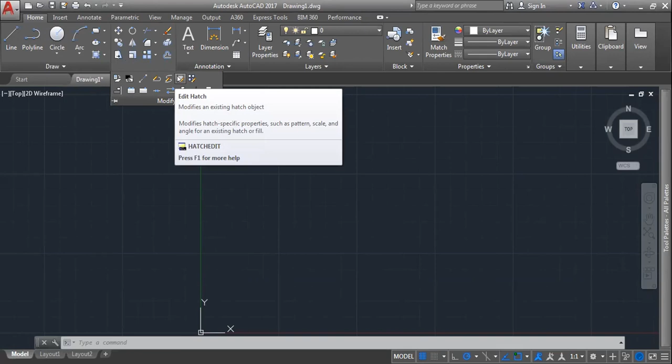Yes, see, below there are many tools. Many of these are not required. Only a few are most important for us, because in this, edit polyline and edit spline, by directly double clicking you can edit it there itself. Edit hatch, as I showed you, by double clicking on the previous hatching we made, we can edit the hatch directly. We don't require this tool. Edit array, polar array, also the same way. And coming to set by layer, before this we need to make layers.

Lengthen, this one I will tell you. Lengthen means it will decrease the length ratio-wise. Let us make a triangle, or let it be a line like this one. Enter. Now select lengthen, LEN is the shortcut. Select the lengthen object, provide the references, and now provide the percentage; especially we use percentage. Select the percentage you want to decrease. Previously it was 25. It will calculate from here to here as 100, and out of 100 it will decrease percentage-wise.

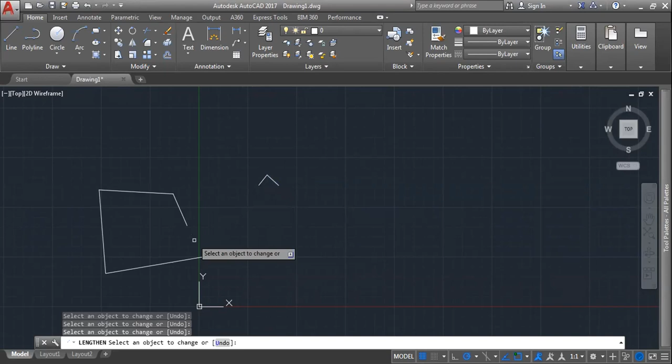I am mentioning 50. See, from 25 converted to 50. Out of this overall length, it will convert that 100% length to 50. In the same way, upward, top, bottom. Actually we will not use this tool much, even though I am explaining it. Overall this tool will cut to the exact midpoint. If I mention 75%, it will cut to 75. 90 means 90%. And after finishing, press enter. That's it. Should I repeat once more? Repeat, sir.

L enter, line. Make a triangle or rectangle, whatever you like, specially using line. Now, lengthen's working principle: LEN is the shortcut. It will cut the parts by percentage or delta or dynamic; percentage will be better for you, to calculate easily. Previously I placed 50%. If I want out of this only 10%, selecting the object, it will cut overall 90% and keep 10%. See, out of this 100% length, it will keep only 10%.

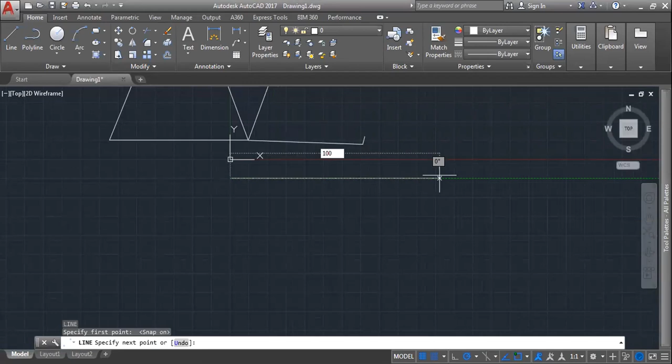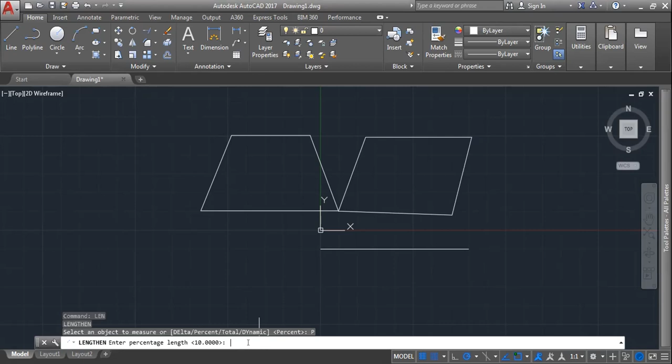For example, I'll enter, let it be 100. Enter. Now extend, like this one. Enter. Fine. Now LEN, enter. Now select how you want to reduce this object. I am selecting percentage. It will measure from here to here as 100%. Out of this, how much you want to cut, you need to mention. Let us mention 50%.

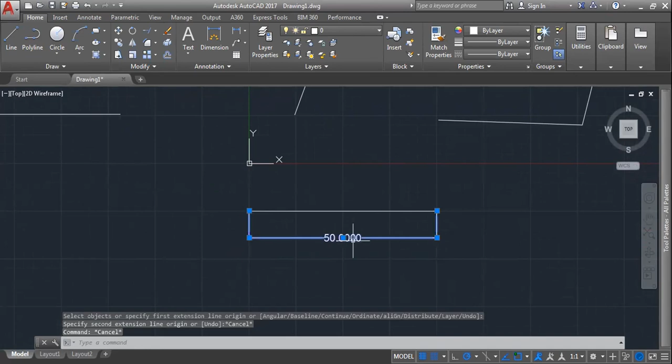See, I am selecting the line. Here we provided 100. Here we didn't provide the dimension, directly we are cutting. Wherever you select, upper side or bottom side, it will calculate on its own and provide the output. Finally enter. Now DIM, enter, we check the dimension. We made a 100 length, and now we got 50 after cutting. Did you understand this? And it will cut from 50 also, 50% at a time.

LEN, enter. Select percent, 50. Enter. Now out of this 50, it will make it 25. Out of this 25, it will cut it to 12.5. Out of 12.5, it will cut to 12.5 by 2, that is 6.25. DIM, enter. From this to here, see, as I said, 6.25. Got this?

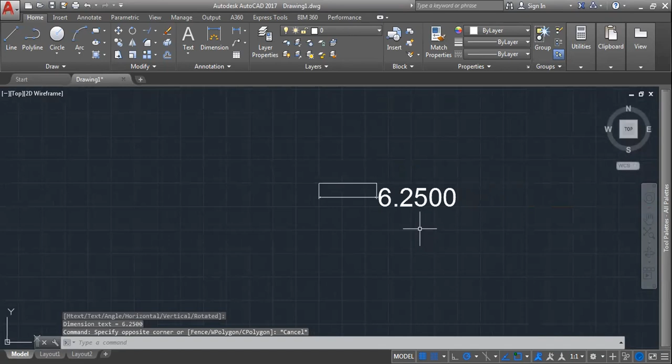Have you understood this tool? Yes, sir. Fine. Yes, sir. It is nothing. Actually, we won't use it, even though, chalo, let us try a few more tools which are used. Okay, I'm coming to the next tool.

Break. Okay, break and break at point, these two. Let us make a circle of 100 diameter, 100 radius. For break, if we have a reference, that will be an advantage. Okay. But rather than using the break tool, trimming will be better. But let it be, no issue.

Select the break tool, BR, enter. Select the object which you want to break. A reference is mandatory, as I said, how much you want. Before breaking, we need to provide a proper reference. If you are using a line as reference, from this line to this line, we can break it directly.

And coming to next, break at point. If I am selecting an entire single circle, it will divide it into two pieces. Select break at point. Now select the object. Now specify the point which you want to separate. I want to select the midpoint. Finish. Now see, first arc, second arc. It divided into two parts. Should I explain this once more? Break at point.

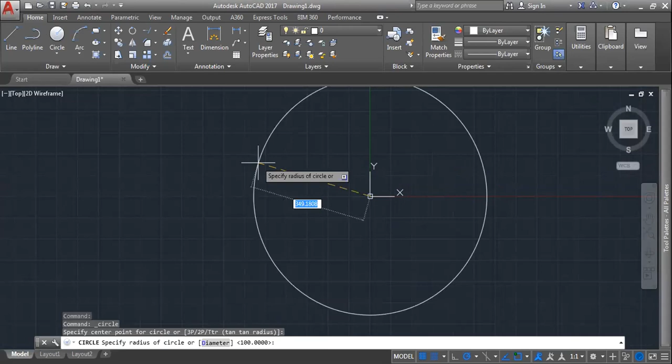C enter. Let us use a circle for this, 100 radius. Now BR is the shortcut, and here it will break. It will cut it out directly. How much do you want to cut out? Better provide a reference before starting. And select here. Got it? Breaking tool: it will cut the object from one point to another point. And coming to next, break at point.

Break at point means, see, this is an entire single circle. If you are making an individual arc or circle, see how it comes. If I am making an arc, first arc, and again, it looks like a circle. Okay, see, it has broken into two pieces. Got it? Like this. This is a single piece.

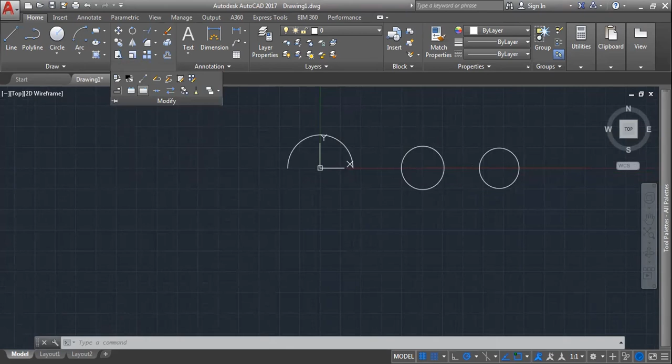And see how a single circle looks without breaking. If you select it directly, it will choose the entire circle. Here only the arc is chosen, separately: top as one, bottom as the other. And this is a single piece. Now I am going to break it. Select break at point. Select the object and provide where you want to break. Midpoint. Now see, first, second arc. Got it?

Individually. Now for this, again select, enter. Select the object. It chooses only the top one. Where do we want to break? It has chosen the other. Select this one, select the object, now provide the point. I've selected the midpoint. Now see, first, second arc and third arc. It will just break, nothing else. It will separate the object into two pieces. Have you understood break at point? Yes, sir. Fine.

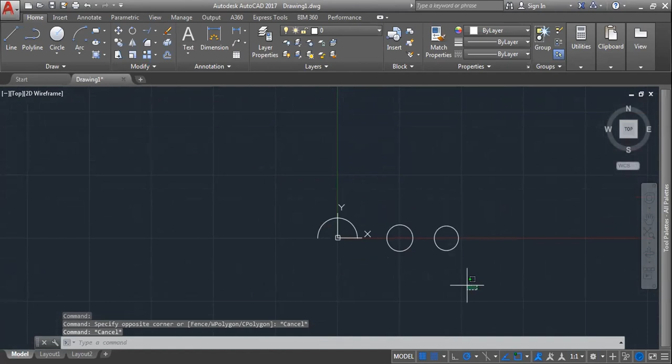And coming to next, let us start the annotation part. First the main dimensions; I will clear all these once more, and also tell you the difference between this and this. And this one, how to make a table. Text, let us see all these. For dimensions, we need a reference first.

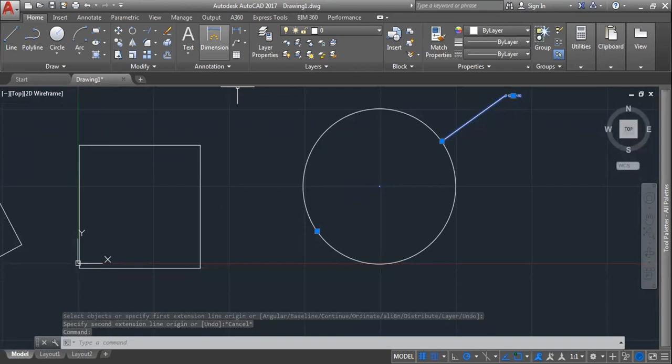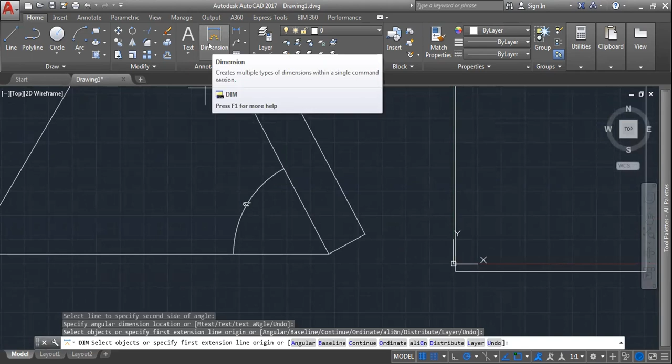By using this single tool, we can choose dimensions individually, whether linear, horizontal, vertical, or anything else: linear, angular or circular. It will even provide angular from one to the other. This works as an all-rounder. Any queries? DIM enter. That works as an all-rounder.

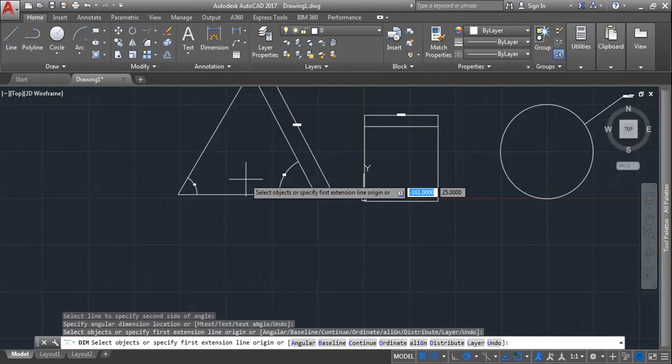See, first it provides linear. Again, if I select this reference, it will provide angular. So automatically it regenerates itself. Any queries in DIM? Have you understood this dimension tool? Yes, sir. Fine. And coming to next, this is linear.

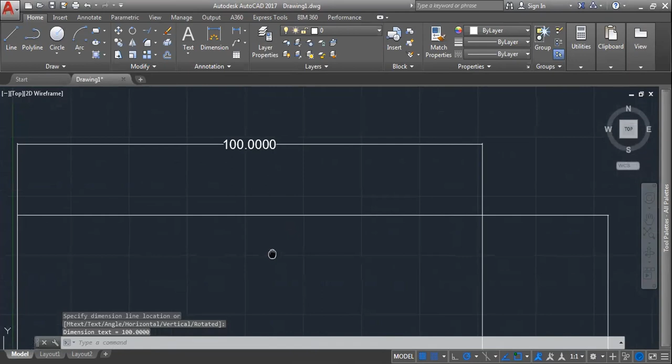What is the main difference? Here it analyses by itself. In many cases, if you want to provide radius, it has provided diameter directly. See the symbol. In that case, you need the manual process. Linear means either vertical or horizontal. The output you get will be perfect. 100 plus 100 we got. For both, output will be perfect. See here also 100. But the selection needs to be perfect for that.

Aligned means angular dimension. For angular you need to use aligned. If I am using linear and selecting this end to end, see how it came. As I said, it will come either vertical or horizontal. See again, linear.

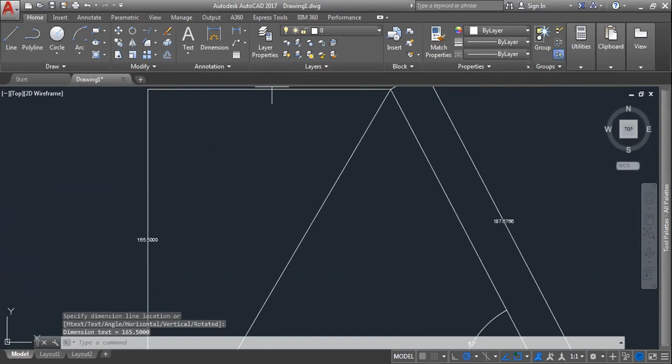Got it? It looks angular, but with this you will get only linear. And if I'm choosing align now, select this one and this end to end, it will choose specially angular length. Okay, align length, angular.

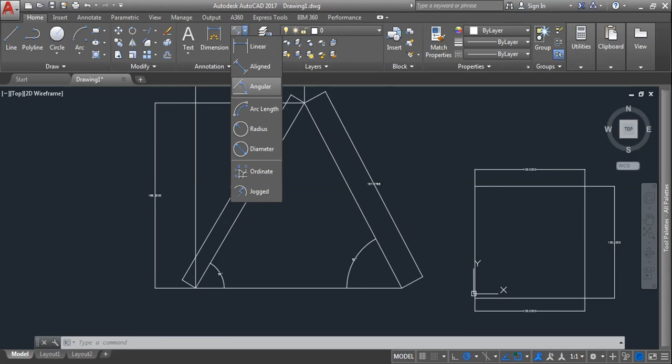That means if you want to provide any angle, select these two and provide the dimension. This angular will provide only angle. For that, two lines are mandatory. With a single line you won't get angle.

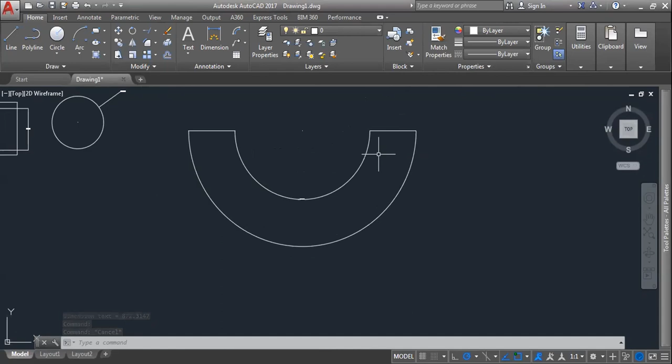Okay, next arc length. Let us make an arc. For arc length directly, it will provide the arc length. 872.3147 - this is the arc length, just as chord length. Okay, and anyway, we won't use this arc length.

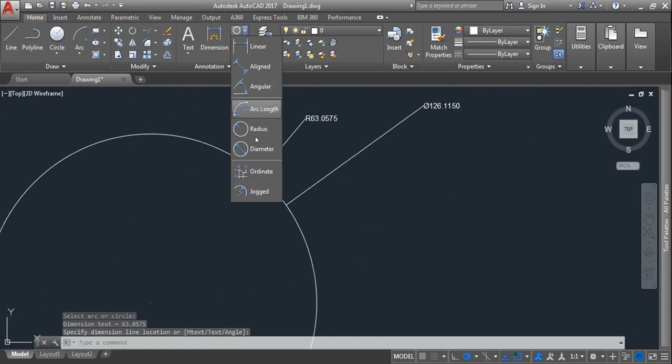No one uses it, especially radius and diameter we depend only on. Radius - here see, manual process we have. If you want radius, you will get radius. If you want diameter, you will get diameter manually here itself, in this only. The output for both will be same, no worries. Okay, radius. Got these all? Yes sir. Okay, fine then.

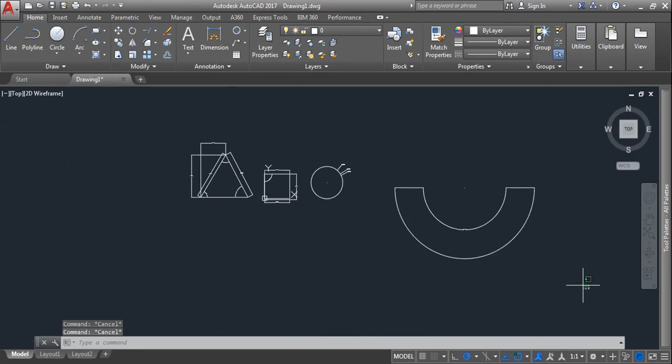And leader - these all specially for welding, as welding symbols for mechanical we use. If there is any mechanical tool which we need to weld, part and anything else, for those portions we use this one. To provide proper welding symbols, there is a certain welding and specially mentioning the ratio, 5 like that. Mostly mechanicals will use this. For civil and electrical, not required. This one, see here you can.

And table - to make any table, select this table. And here you can specify total number of columns and rows, data rows, columns, whatever it is, you can specify as per your norms. Okay, row height, data rows, total amount of rows, how much you need.

And here title bar, data header title directly will get. Okay, title header data. See, title header data like this. Okay, you want title, chalo, title data. Here it is the sample, how it looks. Okay, directly.

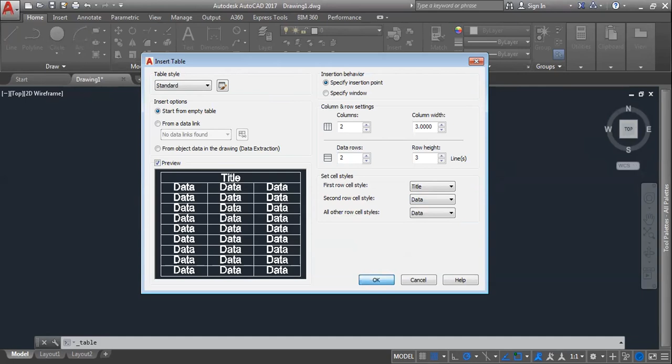If you want directly data only, you can select data only for single title with multiple data and select OK. 3 by 2 I mentioned now, let us provide 3 by 3.

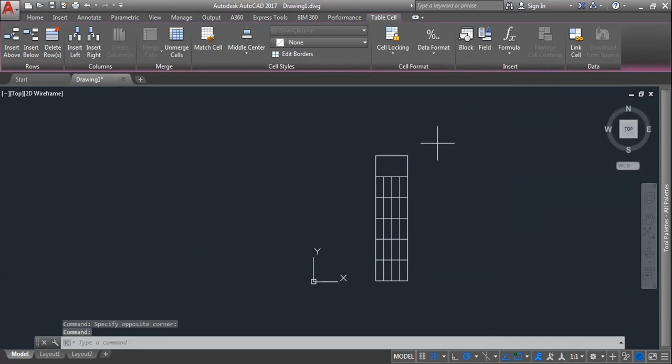Directly you will get like this. And by double clicking, you can change it manually, whether you want to increase here. If you want right side to add, you can add as many blocks as you want in this table.

Insert left means it will add left side, right side it will add right side. It will increase as many as we need. Even below and above - below means directly it will add as many. You can delete also. If you want to delete rows, by using delete row you can delete directly. You need to select before that. Delete rows - it will delete the entire row.

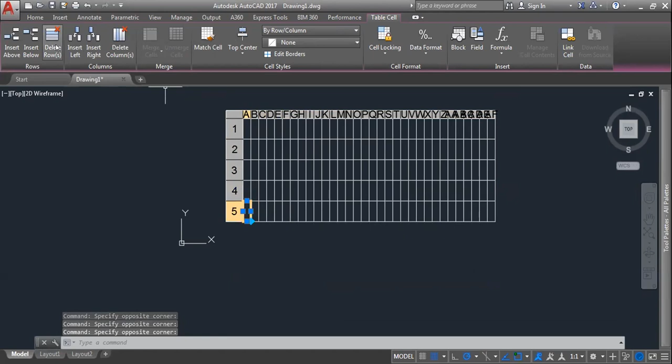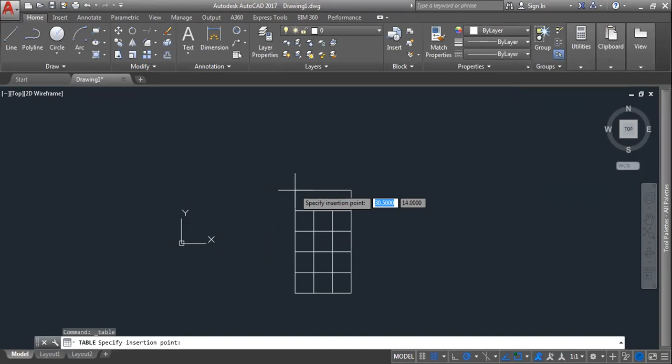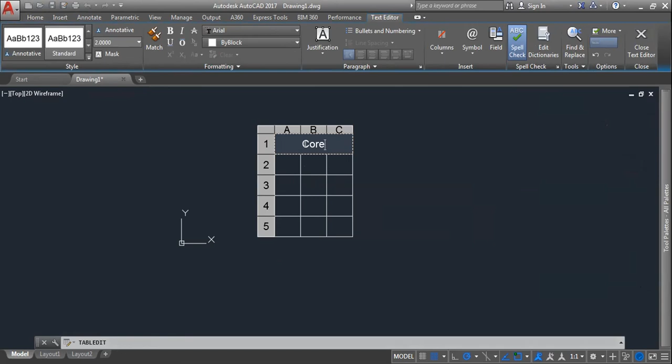And top center, in the sense, as in WordPad we see. I will show you once more. Okay, like this. Now here, whatever you are typing now, let us make something else, text normally. Later on, let us... yeah, 1, 2, 3 like this. If you want to mention now directly...

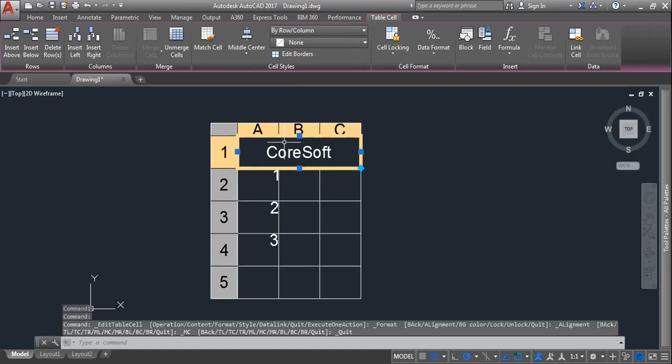Click here, now see at the top, select top left. If I am selecting here, whatever data we entered, it will go at left side at top, top center, top right. Got it? Middle center is what we prefer for the title. Got it? In the same way for these all also.

If you want to select all at a time, select these all. Especially alignment - middle center, entirely it will come directly. Individually if you want to change, you can change also, top center rather than top center... middle right, whatever I am mentioning, it will go to middle right. For here, top center. See, because by default it is in top right. It is in middle right, like this. Here we can change as per our needs.

Directly in alignment, middle center. It will come to middle center.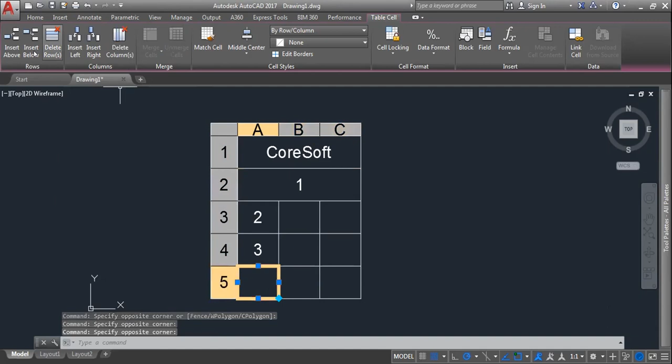Okay, and in this you can merge and unmerge cells also. Here see, here 3. If I want to merge cells - merge all, merge by row. Merge by row, if I am selecting, it will merge by entire row. Okay, by chance, if you want anything else laterally, you can add the columns and rows below. Insert below, see, insert below 1. Insert above, in that case it will insert above. One more, got it? Insert right, it will increase right side. Insert left, it will add left side. Got it? Laterally, it is mandatory to merge these two.

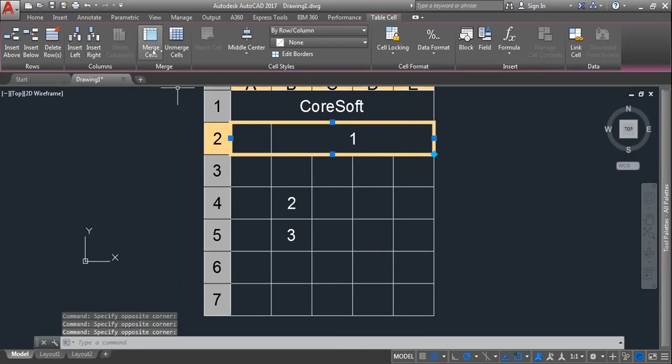Merge cells. Merge by row. Yes, okay.

Any queries up to now, sir? How to increase the size of any word or number? That I will tell you further.

Before that, how to create these boxes, how to increase rows and columns, decrease them. Okay, let us finish this. Yes sir, can decrease also, delete rows, delete columns. Okay, from 6 to 5, it came.

See, delete columns, it will decrease as per our needs. Okay, increase and decrease.

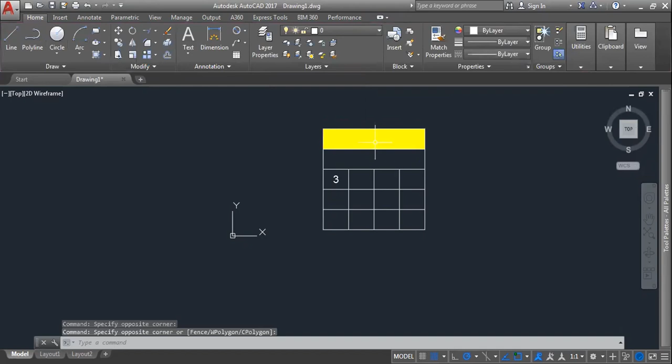And if you want to provide color, you can provide colorings also. None here. If you want to make it orangish or yellow, you can make it. If you are selecting, it will be in yellow, no issue. Okay, by row or column, like that individually.

Even in borders you can add, you can highlight in that sense. Okay, borders, here I am providing none. I'm selecting, just a minute.

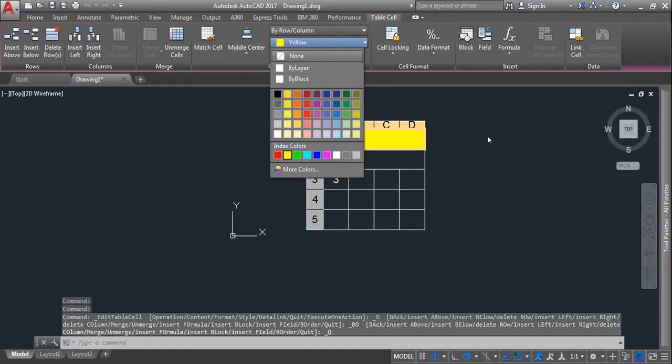Okay, just be on hold for 2 minutes and let me cross check the system. I'm stopping for 2 minutes and I will continue shortly.

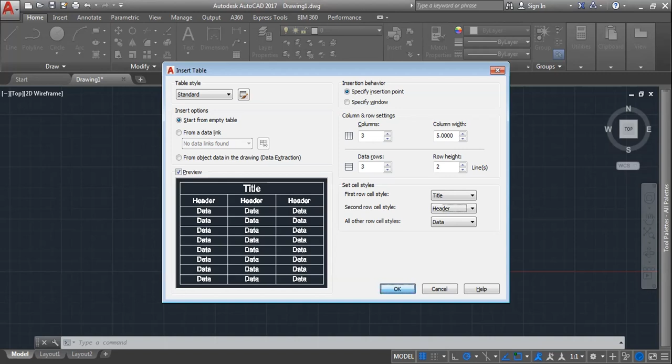For this also I am providing a title itself, let it be a header, and then okay. Now see, this is what, as per the dimensions we provide there, you will get the output here. Okay, to increase the size, it is here.

Here itself, if you are mentioning 0.5, whatever I am providing now, it will come in 0.5 height itself. Default it is 2.5, and control, convert it to 0.5, enter.

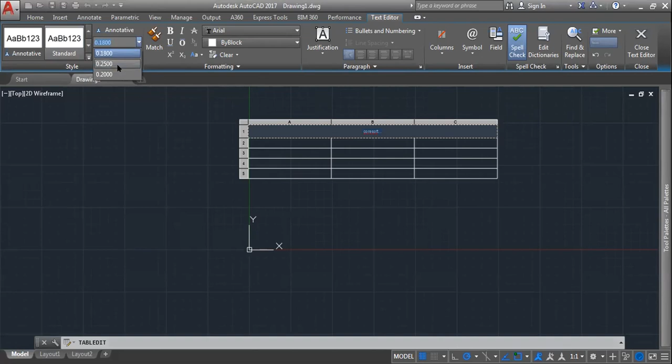As per the length of this, it matters. As per the length, it works. If the height of this is bigger, you will get it bigger in this. But outside, if you are mentioning any text, easily we can increase it. There will be a limit as per the box.

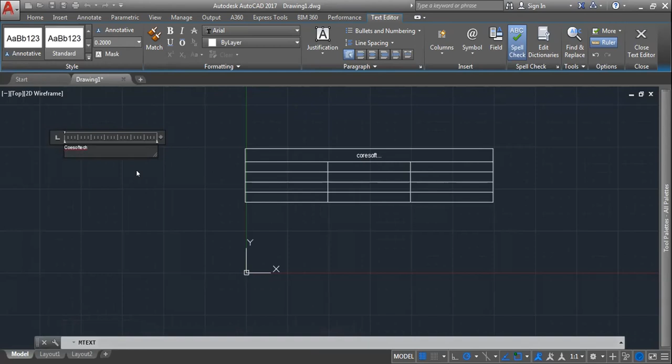Select this, double click here, and even though if you are mentioning 1, it will increase to 1. But here, as per the height, limited size only you will get. You need to increase the height of the box while we are making it.

Okay, fine. Now before that, let us cross check this. Let us finish the remaining part of the table, and in this table...

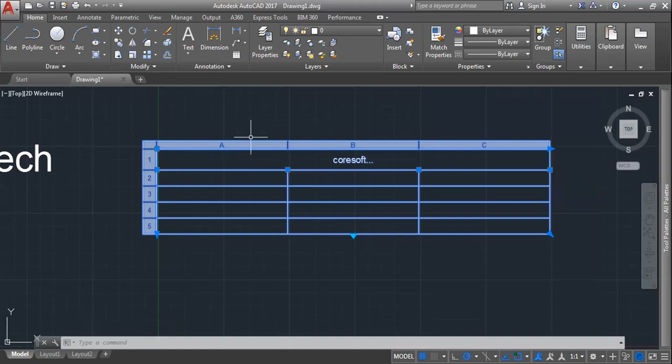Now coming to color, I said by layer, by block. By layer, for that we need layers. Present layer is white color, so we got entirely white color. By block it will be white color block.

Here you can see, and if you are adding layers now, after selecting 'by layer' it will go to the layer you need. That is especially required for electrical engineering. As you queried me how to get red, green, yellow color etc., at that time you will understand the use of layers.

Currently none, and you can add colorings also, for the entire structure at a time, or manually. Select this, and if you want green, it just highlights a bit. More colors you can get as per your choice.

Okay, coming to next, edit borders. For that, let us select this entire structure and edit borders. See, it will provide the borders manually, it will just highlight. If you want to thicken the border by block, it will thicken the border on four sides. Okay, escape.

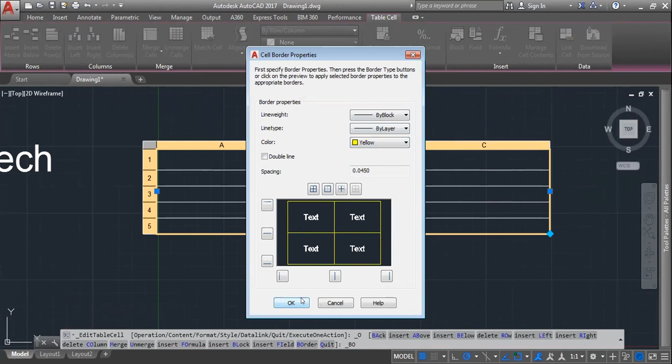You can change color also. Okay, see, the color of this became entirely yellow.

I'm getting... it's getting hanged by using this. If I'm using more amount of time, see.

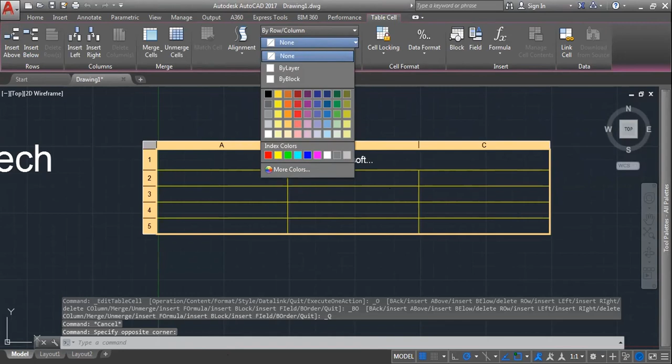Again it got hanged. We will start Task Manager and see it not responding. In most cases it will get closed. Only after restarting you can continue easily. But make a habit to save it as per the model.

End task. And now I can reopen easily. Close the program. Finished. Okay, just wait for 2 minutes.

Actually, if you are using more with this table now, we are getting error. It is getting hanged. Let us continue the remaining part of table and text tomorrow.

I will explain in detail these two, and layers I will start a bit. If you have time, let us finish tomorrow itself. And before that, let us make one more tool, group.

What is the use of group? See, when you are making a model, whether it would be minor or major.

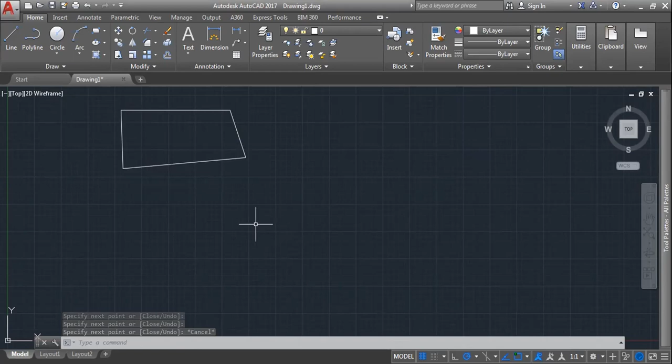Okay, see, enter. Here, whenever you are selecting now, the line selects individually, got it, individual circle. If we want to connect these all in a single group, if you want to make this all as a single structure, a single group, for that we need to use this group tool.

GRO is the shortcut, and enter. Got it? Now select objects. So first select the objects and name it 01, and again enter. Group 01 has been created.

As I said, whatever you are making now, everything we will get here. Command group, enter a group name, question mark here it asks 01. Group 01 has been created.

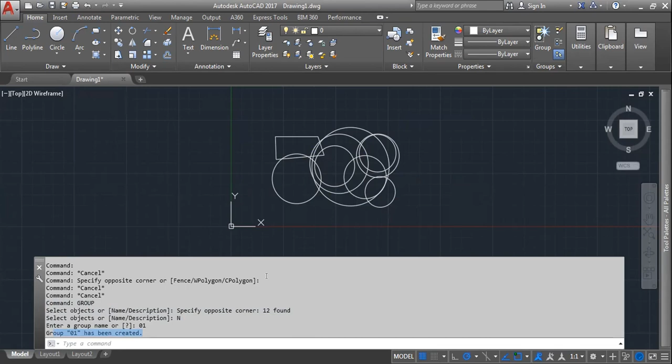See now how we got entirely in a single separate box. Okay, this became a single family. It is easy to drag it or copy it, paste it. Before this, it was difficult to copy, since it made us select individually. Got it? Once your entire model has finished, better convert it as a group.

That will be an advantage for you. And you can edit this group. You can add many in this group. Okay, no worries. Here, group edit, ungroup.

If you want to ungroup this, select the ungroup. Select the group. Select this entire group. Group 1 exploded. Finished. Got it? That is how to group and ungroup.

Any queries in this? See, now manually it is selecting. If you want to move this now, we need to select this entirely and drag it. Even though, see, there is a failure. So group is the best option. Any queries in the group?

Actually, this is most important for civil engineers and also electrical a bit. Mostly for civil engineers, because whenever you are making a 2 BHK flat, if you want to add the same object on the other side, multiple times, 4 to 5 times, this will be the best way.

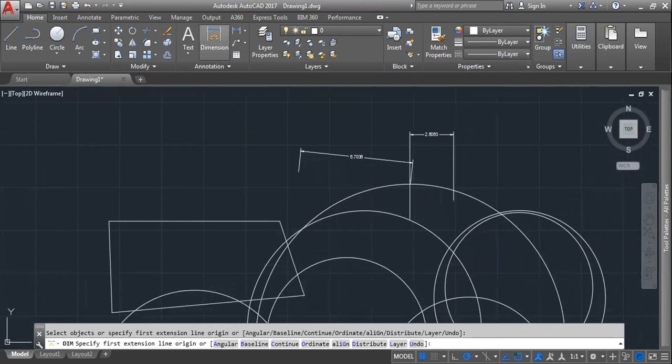No sir, fine. And in this group, not only objects, it will combine dimensions also. Okay, no worries. See, dimension bar, it will go along with dimensions. See, this is the drawback of this. If I am choosing this now, rather than providing the radius, it provided as a length by clicking there.

Okay, let it be temporarily, no issue. Let us make once more this group. Even it will choose, select this all group, and we didn't create a name, so GRO, enter, select, choose all. Now name it 01. Enter.

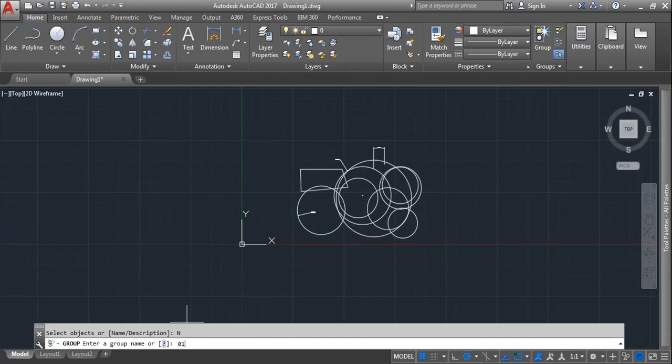See, got it? Along with dimensions, it will convert into a single group. So this will be easy. Even wherever you are moving now, dragging, it will be perfect. No changes will be in this also.

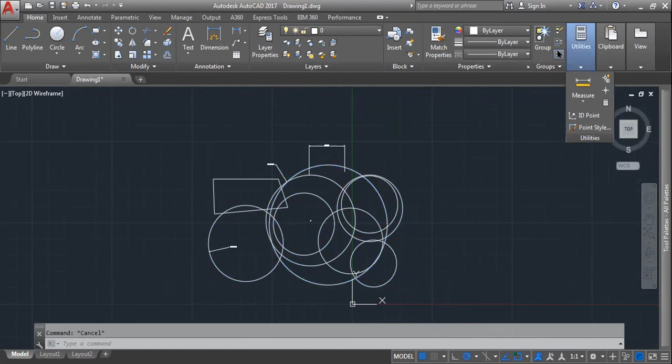Let it be up to here for today. Tomorrow, I will explain group edit and also that this must and should be on group selection. If this is off now, see, it shows as individually.

Group, you need to keep on in the group selection. Okay, here by right click, select these all on, mark these all, list show panels now. In this panels, if anything is missing, mark it on. If I am unmarking the group, I can't see the group here. Right click here, show panels, convert, mark it, you will get the groups.

Okay, fine. Let us continue the remaining tomorrow. Yes, group name number 1, selectable, yes. This is the list, object group key.

If you have any queries, you can list them out, and in your practice, if you have any personal queries, you can drop here. I will explain now, in the past tools, whatever will be made.

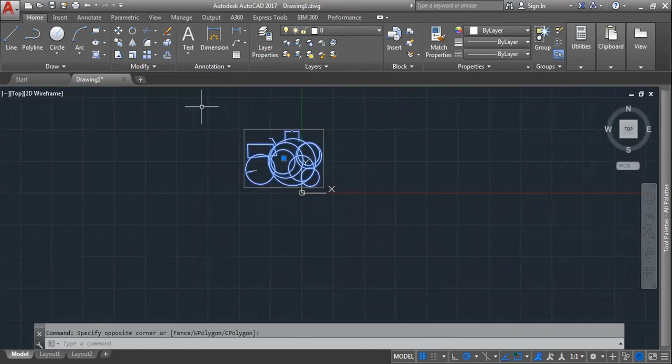Sir, stretch is not understood, sir. When we are doing that, doing the total objects. Stretch what, length? Okay, stretch. I will explain the stretch once more.

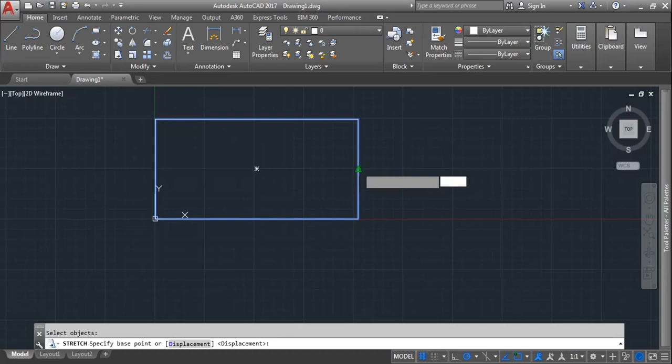Select the object, select the stretch, either this or manually you can select automatically by using shortcut STR. Okay, select this object and again enter. Now displacement, select here. From here how much you want to increase, 10 mm, 20 mm, like that. Here in the command bar you can see the dimension. If you want to increase 50, enter. See, from here to 50 it got increased.

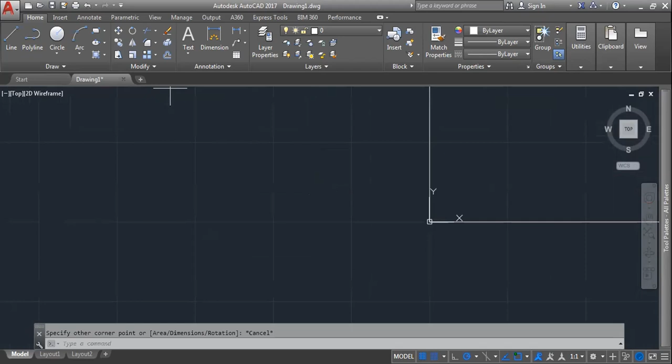As a reference I will show you. Let us make a rectangle. Select the first one. 50 by 50, enter. Okay, and same rectangle, one more rectangle in this row itself, behind this. Minus 50, 50. As I said, we need to provide it plus and minus. Here plus plus, minus plus. In that way only you will get.

Now let us use stretch. STR. See, directly we got stretch tool and select the object, enter. Now select here. STR, enter. Select the object, enter. Now select at the midpoint. It is entirely dragging. Actually, it should not drag.

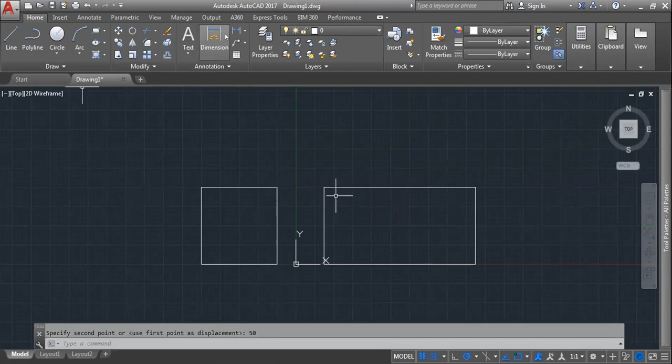Select these three. See, this is what. Now let us provide one more 50. Enter. Now check the dimension. From one end to other end. 100. Got it? From 50 it became 100.

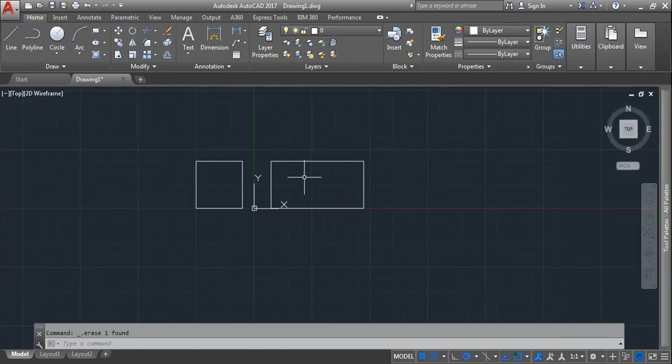Sometimes you will get, okay, don't think that you didn't get. Better close the file and open. Okay, reopen the AutoCAD file. At that time you will get. Just now you have seen, rather than stretching, it moved from here to here. But it happens in many cases. Forget about that. Better try again and again. Like this. Enter. Better midpoint will be an advantage.

If I am selecting 50, it will come to 100 overall. From corner only midpoint we have. From corner itself, 3 sides. That will be better. Okay, or direct single object you can select. Corner 3 lines we need to select. Okay, from left side or right side or top side, 3 lines.

If you are selecting the object, it will do its work, but it is stretching the entire object. Rather than stretching, it is moving from one end to other end. Got it? See, I am using stretch. I hope you have selected directly the single object and entered. Rather than stretching, it is moving because AutoCAD thought that this entire rectangle must be stretched. That is how it is working.

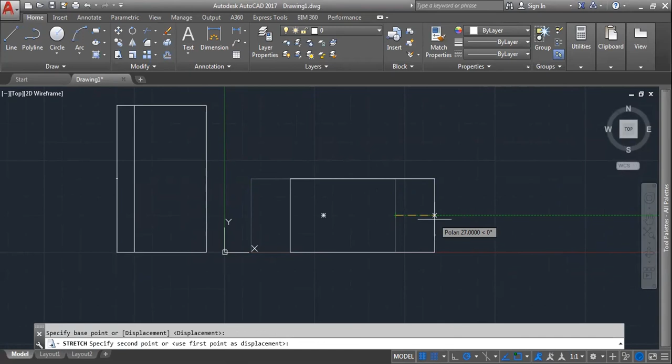Rather than selecting the entire object, STR, enter, select the lines. Okay, only what you want to stretch. If I want to stretch the lines of these three, upper side, select, enter. That's it. You can get even in angularity. Here by using tab you need to provide proper distance. Okay, displacement 50, enter. Okay, it will extend 50 at 45 degrees.

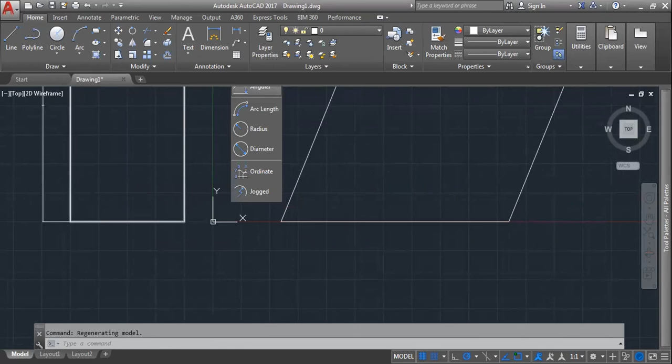Actually, the deeper we go now, the more confusion you will get. That is what. Any queries in stretch? Should you need it once more? Hello, sir. Better practice once more. At that time, if you are getting an error, better inform me tomorrow. That will be better. Hello, sir. Yeah. Okay, sir.

One more, sir. Spline, sir. What's the purpose of the spline? That in cross section. Spline. Okay. Spline. Actually, spline is just a free movement. We won't use it mostly. Okay. Spline fit or spline CV.

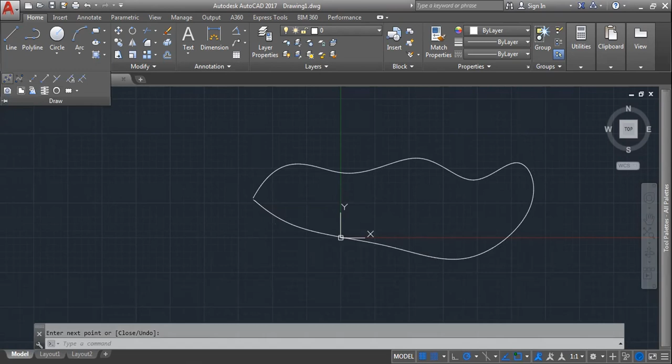Spline, actually see, it will just give free flow. Okay. Up to now, I didn't use it in any companies. So better leave that spline. Enter. Mostly we won't use this. Rather than this, we use the remaining tools, whatever you can see here. Those are important. Okay. Yeah.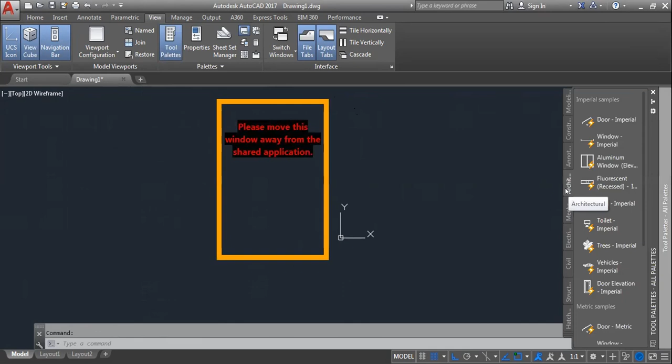Architectural parts I can see. You can see. Okay. In this, select anything else. Let us select vehicles imperial. Now select, paste it here.

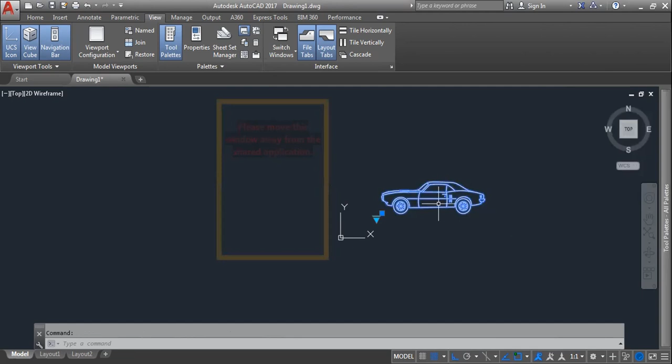Scale. Shortcut is scale, in the sense to increase or decrease the size. Enter and select this. Enter. Now specify the base point.